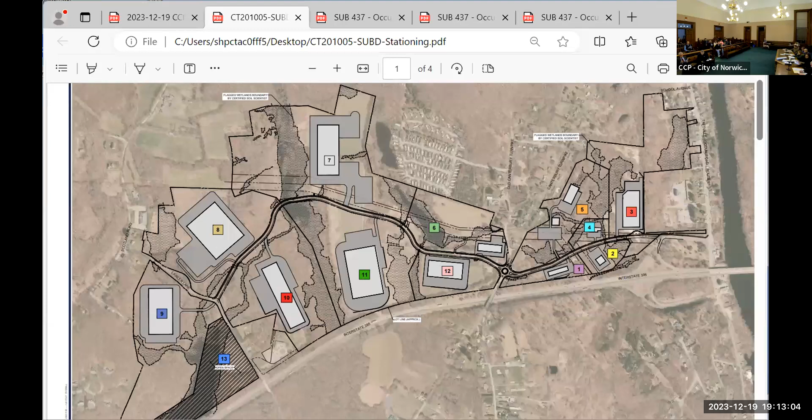Good evening. For the record, my name is Jeff Bord, professional engineer in the state of Connecticut with Bohler Engineering. We're at 65 LaSalle Road in West Hartford, Connecticut. Just wanted to walk everybody through. We heard from the public last meeting. We heard from the commission. A lot of the big issues stem from stormwater management. It was a recurring theme from the public, rightfully so. It's why they bring professional engineers in to perform these stormwater analyses.

So basically what we do for the entire stretch of roadway is a pre-existing condition analysis that looks at all of the existing drainage watersheds, where they're going, what those flow rates are for various storm events. And then when we do our proposed design plans, we take into account those same areas and we develop a post condition. Now that post condition consists of several best management practices. We have swales with check dams.

We have curbless gutters here, which gives us the ability to infiltrate through stone trenches. We have a permeable trail that also gets the addition of infiltration. And in addition to that, we have several infiltration basins located throughout the entirety of the roadway. All of that has been reviewed by the city engineer. It was a rigorous process as we went back and forth through the original wetland approvals. So that's fully designed for the roadway.

A lot of the concerns that we heard were relative to the lots themselves, what's getting built and what the stormwater is going to look like there in the future. Fortunately, part of this process is when one of these lots goes to get developed, say lot 7 or lot 8, for instance, we have to go in and do that same pre versus post analysis for each individual lot and prepare detailed design plans that meet the water quality manual and the erosion sediment control guidelines. And that comes back before the city on an individual basis as they're designed and as they come forward.

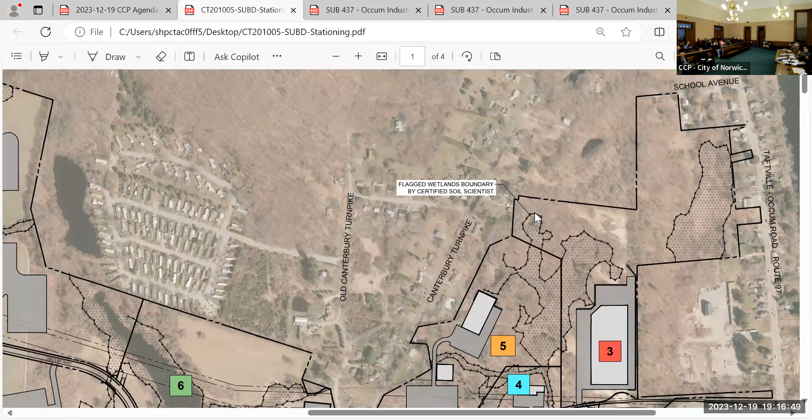So with that, I can turn it over to Mark Flock. I just have a question. Sure. So that cemetery is on lot 3? The cemetery is just off the property, so there's a little notch cut out in the top corner. I see. Yep. That, yeah, and that 50-foot easement, if you zoom in, see that little notch right there? Okay. Got it. So the 50-foot easement would be on our site, off of it to the east and to the south. But the cemetery itself falls off the property. Okay. Thank you. You're welcome.

Good evening. As stated earlier, Mark Flock, counsel to the Norwich Community Development Corporation. Before closing NCDC's presentation at this public hearing on the application for subdivision approval, I would like to address the commission on 2 matters. One is to confirm the jurisdiction of the CCP, which is briefly addressed by the chairperson. And because of the issues that have arisen concerning this subdivision, it is important that the CCP understand the limits of the powers to regulate the subdivision plans.

And secondly, to review the waivers that we have requested and confirm that all requirements for granting of these waivers have been provided. I've provided suggested language to the commission for these waivers, and should the commission vote favorably, I have provided the form of a motion for approval of these waivers. In regards to CCP jurisdiction, NCDC has applied for what's been described as a 12-lot subdivision. There is a 13th lot, which is the dedicated open space.

Subdivisions are regulated by the City of Norwich Subdivision Regulations, which is Article 2 of the Norwich Code of Ordinances. They are also governed by the Connecticut General Statute, Section 8-25, entitled Subdivisions of Land. The law in this area of subdivisions is very clear, and the cases decided by our appellate courts, superior courts, and Supreme Court have consistently held that when the Municipal Planning Commission considers the approval or disapproval of a subdivision, it's acting in an administrative capacity rather than a legislative capacity.

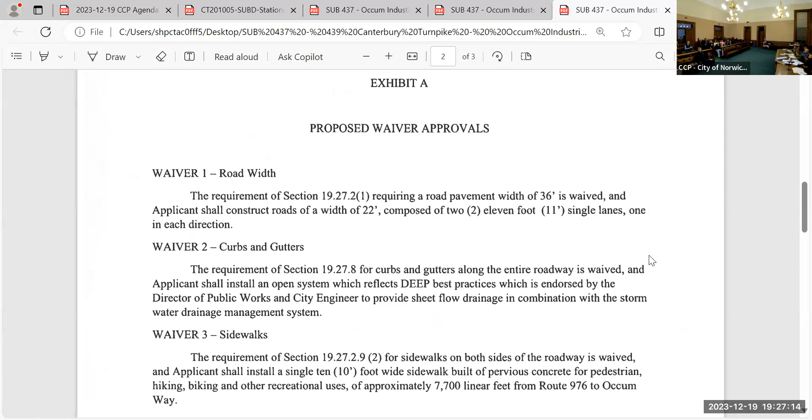We believe that through the presentation that's been made by our engineer, drainage and other reports we filed, and the information contained in the subdivision plan, we've proven each of the following requirements to support a request for waiver. In regard to road width, first, the width of the road does not affect other land in the area, as the roads in the area are pre-existing, and there are no parcels of land which are subject to development on which roads are contemplated, and the waiver only pertains to the subdivision property.

2, an existing regulation for new road permit waivers under 19-27.2, which allows for waiver upon request from the Director of Public Works and depends on site conditions. In this case, we have a memo from the Director of Public Works dated November 20th, 2023, which has approved of this waiver, stating that the proposed waiver is in keeping with current low impact development design standards. And 3, this waiver will not impact other property, since the proposed roadway in the subdivision only pertains to the subdivision property.

In regards to curbs and gutters, this waiver concerns drainage, which will only affect the subject property, and the designed stormwater management system on the property, as has been testified to and presented by Mr. Bord. Section 19-27.8 requires curbs and gutters, which have to do with street design, and which allows for waiver, and Public Works, again in the November 20th, 2023 memo, says that the waiver is in keeping with current low impact development design standards.

Dan, you want to? So this upper part is the planned development district. You see the dashed white line, and the lower part is the general commercial district. And where does it say that here? It's right here. PDD, planned development. Okay, I see. But it kind of comes off of this, I mean, it's larger than what is within the parcel. So can we get a zoning designation on the map so we can see what it looks like?

Okay, so this is this side, so everything south of, I'll show you, I'll walk you right here. So there's a white line that's right here, that's labeled general commercial. So it's basically everything east of Canterbury and everything west of Canterbury. There's a white line that's labeled. That's all I wanted to know. Sure.

Does she have a question? What was the agreed on road width again, please? I forgot that in the last meeting. Yes, there were two 11-foot wide travel lanes, 4-foot paved shoulders, 3-foot wide gravel strips, and then the 10-foot wide permeable multi-use trail on one side of the road. It's marked on the plans. Thank you. So it'll be 30 feet wide. Any other questions from the commission?

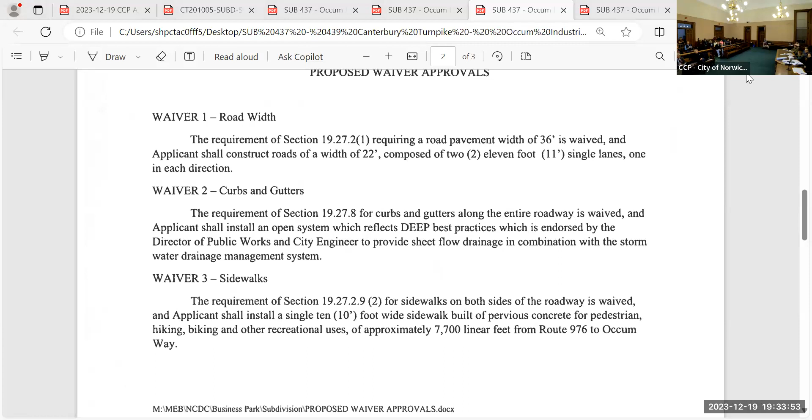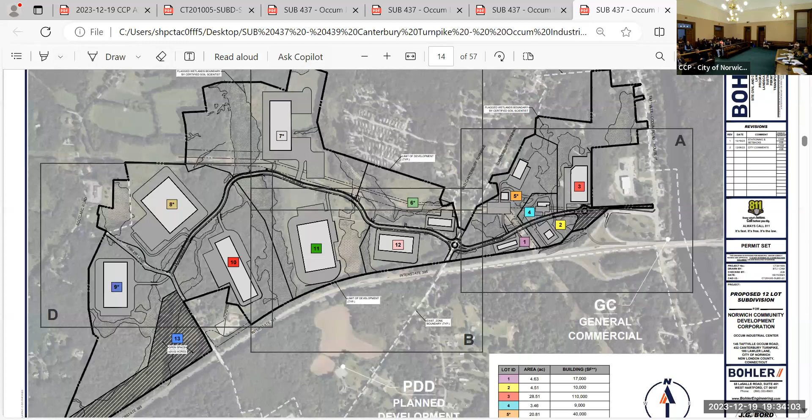Also, the number of stories per building, that's just built into the zone, except for. Well, I do have some more questions. Okay. The roundabout on Canterbury Turnpike. And you said that we can consider intersections of roads for subdivision. So the roundabout. My concern is that I don't want to see any extra traffic going onto Canterbury Turnpike at all. So what have you done to prevent traffic going south onto Canterbury Turnpike?

Can I ask you a question, Madam Chairman? You have a series of questions for us? I just have some questions. They're not in writing. I just have them down so I can ask when we're going through this. It would be preferable, since we've got a number of us here, if we could get the questions and then come back to you, perhaps take a recess for a few minutes, at least digest the questions. That would be helpful. Okay, so that's my first question. I really don't want to see any truck traffic going on to Canterbury Turnpike at all.

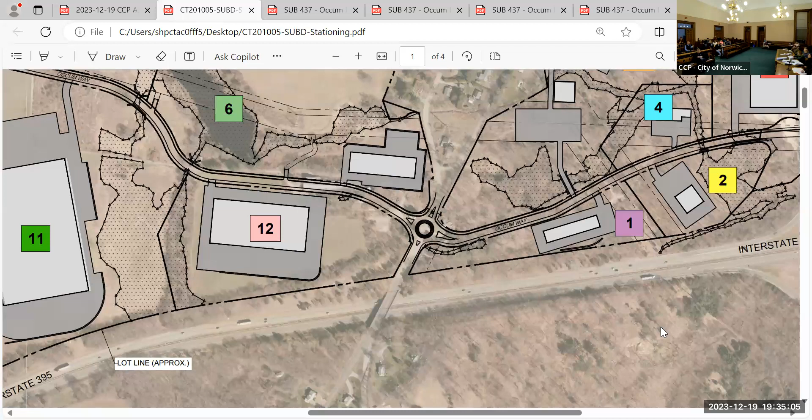Okay, lot 13, you have as open space, right next to lot 9 is the open space area, which is mostly wetlands. I don't know if the commission saw that. I don't know if that's really an acceptable thing for me. I would like to see something that has less wetlands on it. And

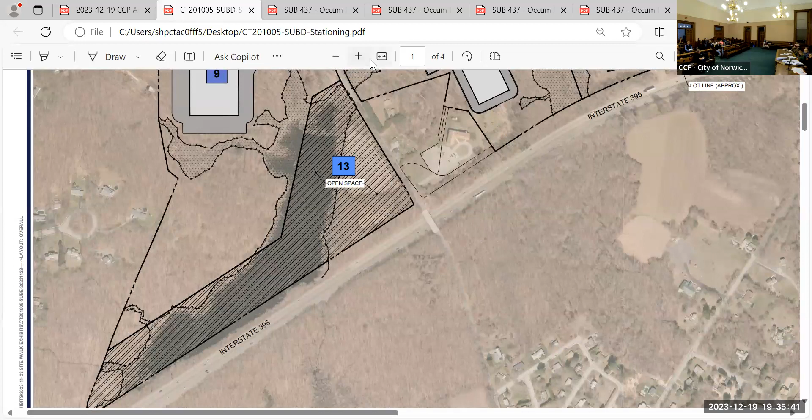Can I speak to that? Go ahead. So that parcel right there, that was something that previously was highly important to people when they talk about this piece of land, is that visual wetland from 395. And so when the applicants talked about open space for conservation easement, I said that was really an area that we wanted to protect.

So it is wetlands, which means it's protected anyway, but there's a dry area in front, and it's a great habitat, and I think it would be a really wonderful thing to preserve and also do some natural walking trails. Then maybe we can expand that, and maybe lot 9 can be the open space area. And then we won't have that problem of going across lot 9 and 13.

So that's my one comment about open space. I just didn't think it was extensive enough to meet our regulations. I know we want to preserve that lot 13, but I think it needs to be a little bit more open land, right? Okay. Lot number 5. Where it abuts, I think there's 3 houses. Okay. What is the distance? And I know this is just proposed, but it is pretty limited because of the wetland. What is the distance of that building to the property, and what are the grades there?

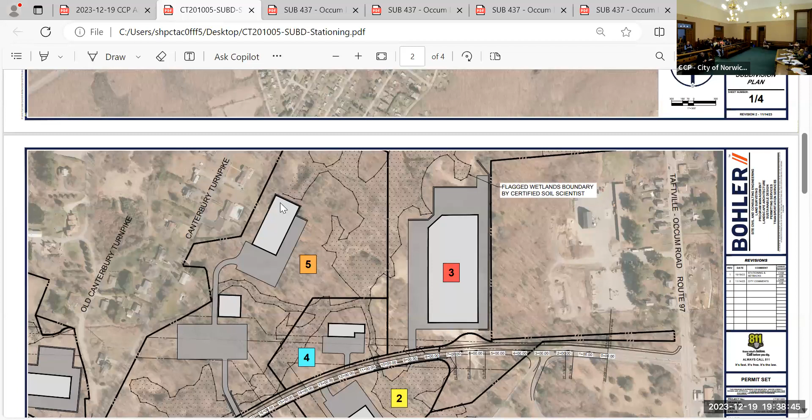So those are my main concerns at this point in time. And I think you can address those. And especially, like I said, the Canterbury Turnpike, and I'm just one person on this committee, so I don't know if the rest of the committee agrees. Can the applicant have 5 minutes to convene with its staff, please? Sure. Do you want to take a break, or take time from the public? It's up to you to decide. Yeah, you can do that if you would like. What do you want to do?

I just had a question. What about the other commissioners? Any other questions? We could write down the stipulations more clearly and address them after a recess, or talk to the public during that recess. We can't talk to the public during the recess, but if they wanted to have their small meeting and continue on, it's up to you if you want to take a short recess. I would like to take a short recess. I would make a motion to take a short recess. Okay, for 5 or 10 minutes. What time is it? It's 7:40. Thank you very much. Pause, please. Sure, that's fine.

That would help. Jeff Board, for the record, Bohler Engineering. As Mark alluded to, that roundabout had been designed with public safety in mind. I know one of the big things we looked at was the geometric shapes of the curbing from the truck circulation standpoint. From a public safety standpoint, you do need to provide access onto Canterbury for a fire truck and emergency vehicles, which we had done.

The curbs themselves and the splitter islands in between have been designed to deter trucks from going onto Canterbury. So it was in the geometric design of the roundabout that we tried to achieve that. So we will deter trucks going onto Canterbury? Correct. That is correct. And fire trucks will still be able to make those maneuvers. One of the other things is already on the plan.

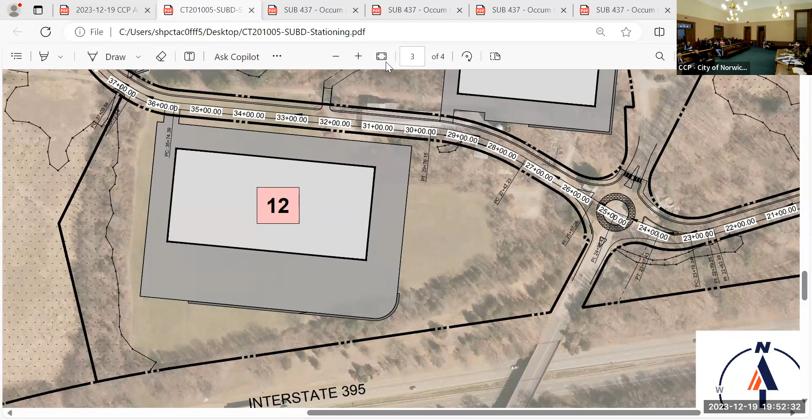I know at the intersections themselves, we do have crosswalks. Once the final driveway locations for each of these individual lots are established, crosswalks will be provided on those as well. So that's a condition that we can comply with. And again, at the intersection, we already show them. And then regarding lot 5, Dan, if you could scroll up to lot 5.

One of the things that has come up, and it's been a big point of concern from the residents along Canterbury in that location, what you're seeing there is about a 50-foot buffer, 2-story, 30,000 square foot building. We have looked at alternatives to that location. We are able to provide a 100-foot buffer at that location with a 20,000 square foot building that's 1 story.

Basically pulling that building as far away from Canterbury as we can, reducing the square footage and then losing a story, which would be a 100-foot vegetated buffer in between the two that can then be supplemented with evergreens and bermed on the development side. And would you show that on the plan now? No, not now. Yeah, so we could show you roughly where that would be.

So the building would be sitting basically back in this location here with the parking area up in here about 100 feet off the property line. And right now, that's about 50 to 60 feet off on the plan. So the parking lot would start back in this location, probably right where my fingers are here. And then it would be tucked away more in the rear of the lot, leaving this mature forested area, and an area that we could berm up and supplement the additional forest in between.

But now the wetlands is there, so moving it up, are you in the buffer area of the wetlands? Well, you're going to have to go to wetlands no matter what. Yep, once that does get designed, we'll have to do an entire drainage design and come back to the commission. So as part of this subdivision, if you could show a 100-foot buffer along that area with a berm and the evergreens.

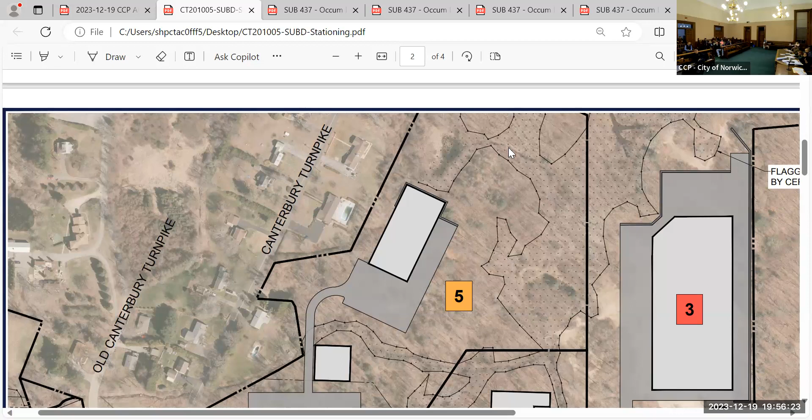Yeah, okay, that would be. Okay, so it could be text in that buffer strip. And how would I describe that on the map, with what property boundary it is? Dan, can you make it a little smaller? I'm just trying to see what boundary line that will be. It's the northwestern corner of lot 5, abutting Canterbury Turnpike. Okay, so the northwestern corner, lot 5, right?

Okay, are you going to prepare that language, or do you need us to prepare that? I can do that. I can prepare this right now, as I'm bringing things up. Very good. Thank you.

I think that Mr. Bord addressed all of your questions except the open space issue. Our position on the open space issue is that it would require an adjustment of lot lines and lot design, and that's not within the purview of this commission. The issue you raised on the amount of open space and lots is strictly a site plan issue. We're entitled to provide for the design of the lots and their boundaries.

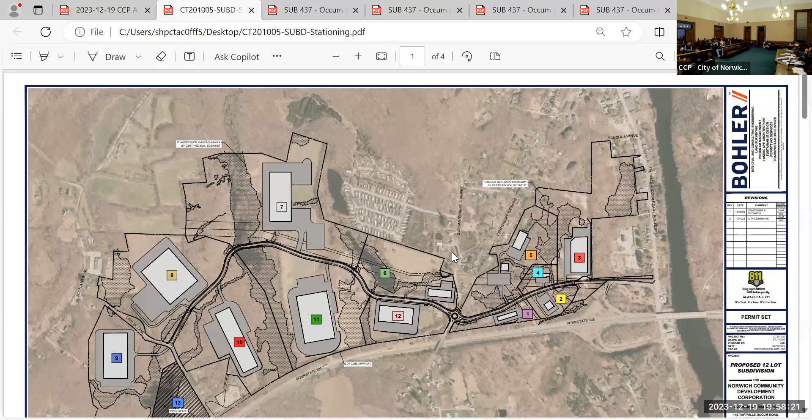The regulations say it can't be less than 5%. And I think maybe the statutes say 10% maximum. No maximum? I think 10% is not considered a taking. I find the regulations say no less than 5, but I think the statutes say up to 10%, though I don't remember offhand. I believe the plan complies with the open space requirement. Okay. Thank you.

Any other questions? Okay. All right, then I am going to open this up to the general public. First I have Charles Witt from Canterbury Turnpike. Good evening, my name is Charlie Witt, I'm at 511 Canterbury Turnpike. I'd like to address the roundabout. We see the pictures on the map of the trucks coming up and not being able to turn. But what about the trucks that come from Baltic Road that are going to come up Canterbury Turnpike?

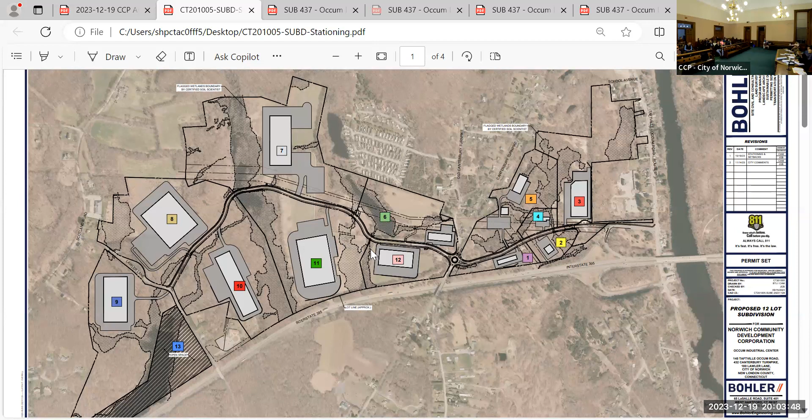Do we have like a flow-up of that? I don't think. Just so he can. Not with us. Okay. Yeah. When we were on the site walk, we could see how it was gonna work. And that's why I think it's important for you to understand how they're gonna have some. Right in that area, they're gonna have a light. And they're gonna stop, and we'll be able to go into the road, so they won't have to access 97. Right. They won't have access. Right. Sorry. Okay, can you just explain that one more time?

So the interchange will be signalized right there where the cursor is now. And so traffic coming off of or heading back onto from the arterial road coming out of the industrial park or going into the industrial park will hit that signal and be directed, and therefore don't need to go to the right, is the point that I think we were collectively making. There's no need for them to go to the right and dump onto Route 97 in the first place to then become errant traffic. That signalized intersection, plus GPS, plus the mission of the truck drivers that are moving to and from, plus the signage will direct all traffic into the industrial park.

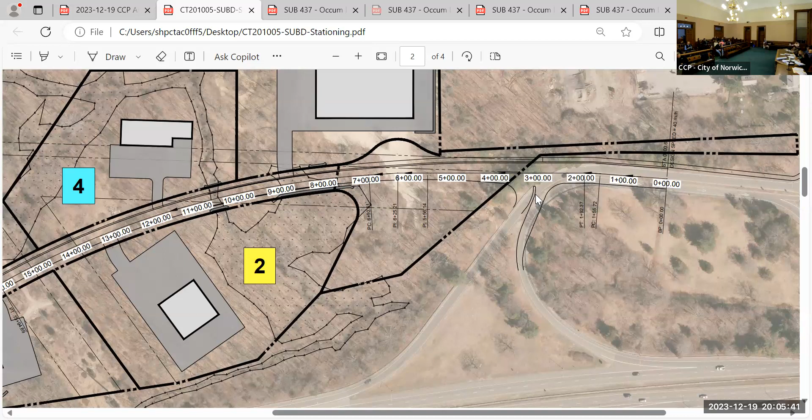Good evening, I'm Sue Jacobson, 256 Laurel Lane. I had the privilege to go on the site walk, and I was struck by the profound beauty that was there. I had forgotten how beautiful it was. My biggest concerns right now are the runoffs, the water. My basement is still flooded. There's water bubbling up from Canterbury, from Laurel Lane, on that hill, the water actually bubbles up. I have a well and I have a septic, and I'm concerned about it, as well as all of the pollutants that might be running off of whatever they use in the industrial park. So that's my major concern.

I do have concerns about the roundabout and the traffic coming off of 395 onto 97 onto Canterbury Turnpike before the access road. But I think that's probably my biggest concern. With the sidewalks, I really would like to see the sidewalks. They're putting in a new development on a subdivision on Hanson Road, I think it is. And it's beautiful. And they've got sidewalks on both sides of the street with little pieces of grass growing. It's really nice. My biggest concern is my basement, my well, my water, and the septic, and what the pollutants are doing to the area, to the natural. So thank you.

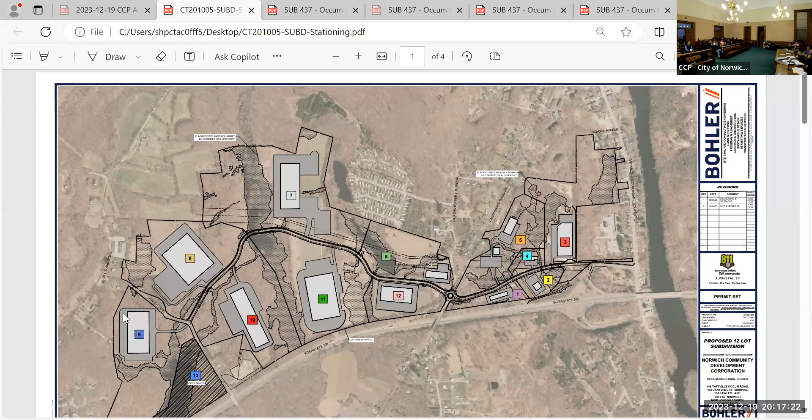There will be a final plan with all of our conditions and modifications on it. That is correct. That will be available to the public. It will be in the land records in the town clerk's office. And as far as lot 9. You see the wetland area in the heavy crosshatch.

I went down there after the beavers built that dam a few years later, because I was curious to see how nature took over on a place like that. And I got one of those butterfly nets, and I went in and I scooped the water up, and it was teeming with frogs and pollywogs and salamanders. And I suspect there's fish in there too now, because the ducks land and the fish get into the water. So this isn't just like a little bit of soggy ground. This is a whole ecosystem. Right.

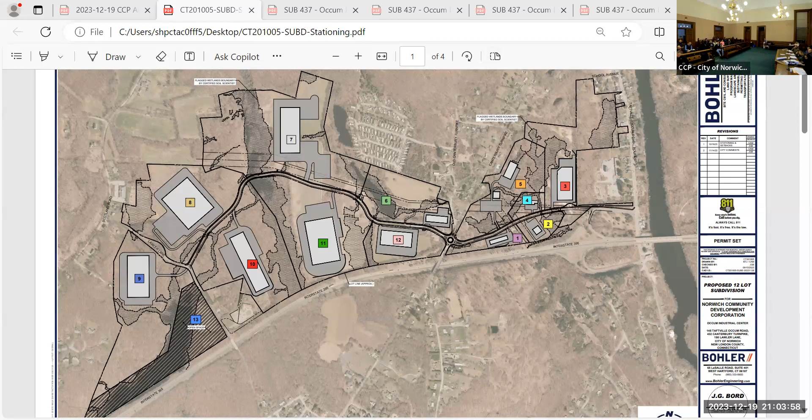The white lines actually are hard to read on a PDF screen here. But basically, as we described, in red, we're showing those temporary cul-de-sacs at strategic locations, depending on the phasing of the road. So in white right here was the phase one from Route 97 over to this location here. That red that Dan's highlighting would be a temporary cul-de-sac for a turnaround for the first phase of the development. The second phase would be in this location here for 12, 6, 11, and 7 with a temporary cul-de-sac here.

Similarly, 8 and 10, there'd be a cul-de-sac at the end, which I referred to earlier with the gate and the lock on it for emergency access only. And then the last phase 4 being just lot 9, whenever that does get built, that temporary cul-de-sac would be removed and the connection would be made to lot 1. So is that part of this plan that we have? You have a plan for the full build out of the roadway that's been fully engineered without any phasing? Correct.

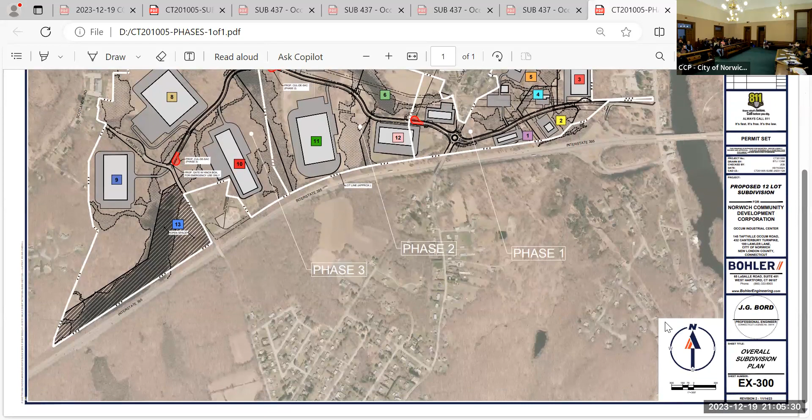Should that be part of our? This is now going to be part of the record because he's presenting it. So what is the sheet number on this? I can't see that. What is it called? EX 300, and then it was overall subdivision plan. And EX 300, I thought it is in the plan set. It's not right now. I don't believe we had included this. I think this was done for one of the hearings. Okay, thank you. I can't recall if we showed it last time or not.

I don't think so, but I didn't know it was there. I didn't see it. I know we have 300 numbers. So it's included. By virtue of this, it's included. Yeah, EX 300. What is the title? I'm sorry, I don't know what it is. Overall subdivision. But it shows the phasing. The phasing. Thank you. And would you like to address any of the other questions? Comments?

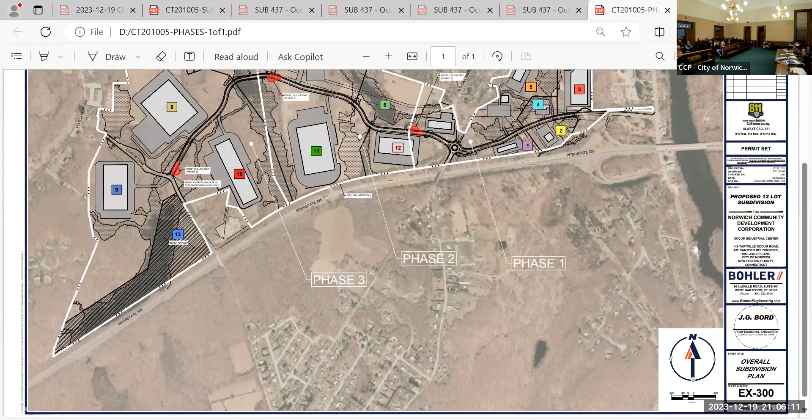So the stormwater drainage piece that Mr. Trinkus brought up, it's interesting in the sense that currently we do comply with the 2004 Connecticut Stormwater Quality Manual. What's going to happen here, and we've spoke to this quite a bit, is that as each individual lot is developed, we're going to have to revisit all of the drainage for the roadway. The reason why the roadway drainage is shown now was to show potential build out to get our wetlands approvals.

But for example, when you develop lot 7, lot 11, any of these larger lots, any of the drainage systems we have adjacent to that roadway are going to be looked at holistically with the actual development, and any modifications made will be presented to the commission and fully designed at that time. Now, at that time, each of these go into design, that will include, to Mr. Trinkus's point, geotechnical testing in multiple locations for each basin.

So regardless of what we're modifying, whether it's along the roadway or if it's in the site with underground detention that's tying into that roadway network, ultimately into the wetlands, all of that's going to have to be fully designed and compliant with the water quality manual, which will be presented to the city engineer.

And you have the whole... Yep, yeah, and we had submitted part of that and back and forth. We went to the city engineer. He's fully reviewed the plans as well, and that got approved as part of the inland wetlands application. And again, subject to change based on the individual use, but that comes back to the city for review.

All right. Okay, does anybody else have any comments? All right, Commissioner, you want to discuss this before staff comments? Okay, staff comments. But do you want to ask the comments first? Yeah. Lead staff. Okay, do you have? I just have an additional comment I'd like to make.

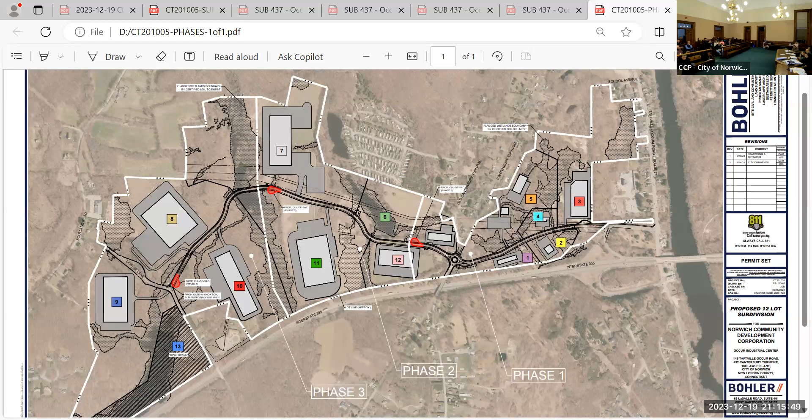We do have an exhibit list, Dan, if you just want to bring that up. These are all the documentation that the city has received. Before the meeting tonight, there were 51 exhibits in this file. All the way up to my last review memo today, we've also added to the exhibit list for you to know: number 52, Mark Perkins' intervenor request; 53, Ryder Beckman's intervenor request; 54 was Trinkus Engineering's memo dated 12/15; 55 is the resume CV for Stephen Trinkus.

56 was the sign-in sheet for the continued public hearing dated 12/19/2023. 57, Frederick Browning's intervenor request. 58, Susan Jacobson's intervenor request. 59, Holly Watson's intervenor request. All the intervenor requests have been determined by our land use attorney to be invalid because they do not meet the statutory requirements for intervenor status.

So I have prepared a memo that had conditions, or as I'd like to say, stipulations, because subdivisions technically don't really get conditions, they're really stipulated. And there were 15 stipulated items on that memo. Dan can pull that up if he wants. I just wanted to give this information to you.

And then the other things that would have been stipulated that were discussed tonight for you to consider: that a crosswalk be installed at each driveway in the subdivision for the trail as a requirement of development of each lot; that the standard 50-foot buffer be increased to 100 feet along the shared northwestern boundary of lot 5 with residential properties, and that the subdivision plan indicate that the buffer shall include a berm and landscape plantings when developed.

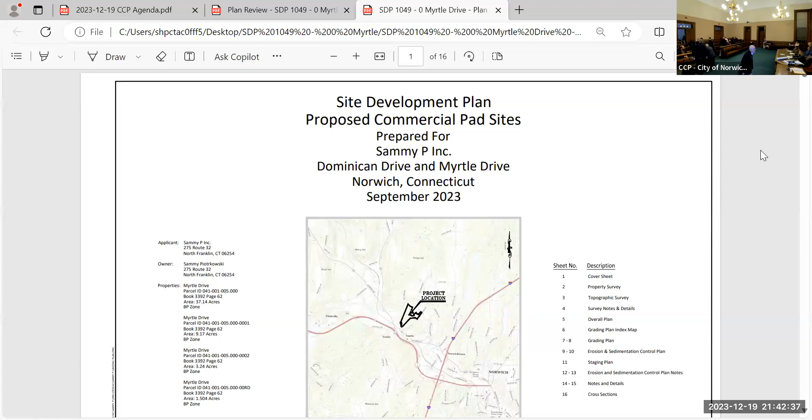Thank you. Yes, thank you. Talk about procedure. Right. If you guys could move quickly, because we have the rest of our agenda to do. Thank you. We have more things on the agenda. Oh, did someone fall? Oh, it's not awful. Okay. Is it ready?

It was 10:29, right? Okay, site development plan 1049, Myrtle Drive, site plan review. Site plan review for land disturbance activities associated with preparation of a commercial pad site for future development, application of Sammy P Inc., property of Sammy Piotrkowski. Assessor map 41, lot 1, lots 5, 5.1, 5.2, 5.RD, zone BP, received on 10/17, tabled 11/21, 23.

So I think those hours are a little extensive for that rock crushing portion of it, because it'll be next to the housing facility. Yeah, definitely. I don't have the city ordinance up right now, but I know there are some ordinances regarding earth removal. I think there may be some hours in it. Did Rich send that to you? I did look at that before the meeting. The hours stipulated are no material processing from 7 PM to 7 AM. So from that perspective, it would comply with the hours of operation.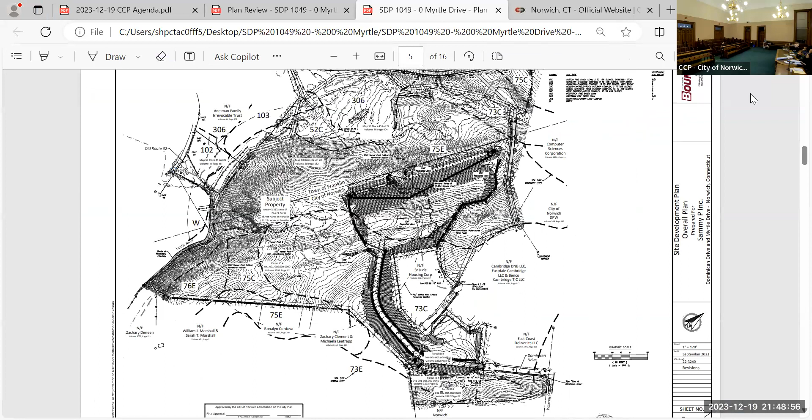Understanding that they are right next door, I don't think it'd be unreasonable if you put a condition on it. I think 5 PM. Yeah, definitely. And 8 to 12 on Saturdays, no rock crushing. Do you feel comfortable with that? Okay, so Monday through Friday, 7 to 5, and no rock crushing on Saturday. So how long will that go? We're expecting construction of the project in its entirety would be about 1.5 years. A little bit longer now with 2 hours cut short. But from proximity to elderly people, I think that's reasonable.

So if this is a site development and there is not a public hearing, you don't need to close a public hearing to make a decision. Are there waivers requested? We did ask for a waiver of a couple of the application requirements, not from regulations, but the application did require elevation drawings of buildings and signs, and at this time we don't have those. That's fine. It's already approved? No, it was tabled.

So I would just ask to waive the reading of the bullet points in my memo. We'll provide them to the clerk and it will be in the approval letter. Motion to approve with conditions 1 through 15 on the memo, Dan's comments on item number 13, and an additional requirement that the operation is Monday through Friday, 7 to 5, and Saturdays 8 to 12, with no crushing on Saturdays.